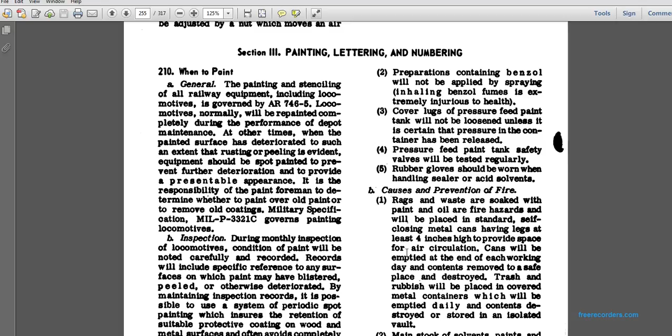During the monthly inspection, the locomotive's paint condition will be noted carefully and recorded. Records should include special references to any surfaces which may be blistered, peeled, or otherwise deteriorated. The possible use of a system of periodic spot painting will ensure retention of a suitable protective coating on wood or metal surfaces, and often avoids a complete repainting of the equipment.

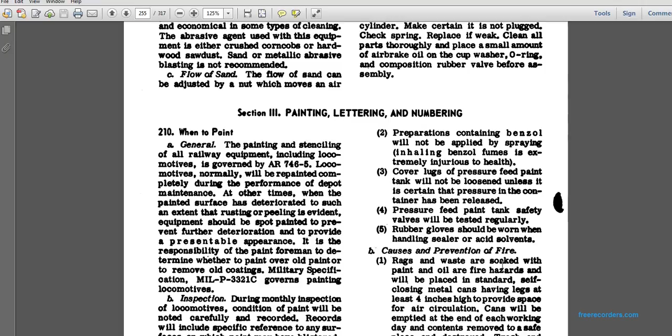211. Safety precautions. A safety respirator will be worn during all spray painting operations. Preparations containing benzol will not be applied by spraying. Inhaling benzol fumes is extremely injurious to health.

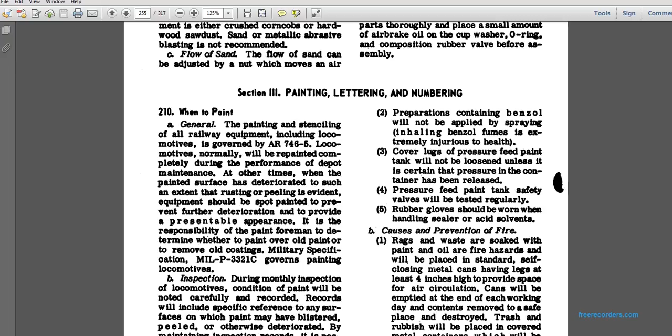Cover lugs of the pressure feed paint tank will not be loosened unless it is certain that the pressure in the container has been released. Pressure feed paint tank safety valves must be tested regularly. Rubber gloves should be worn when handling sealer or acid solvents.

For the prevention of fires, rags, waste, and other oil and paint-soaked materials which are fire hazards will be placed in standard self-closing metal cans having legs at least 4 inches high to provide space for air circulation. Cans will be emptied at the end of each working day, with contents removed to a safe place and destroyed.

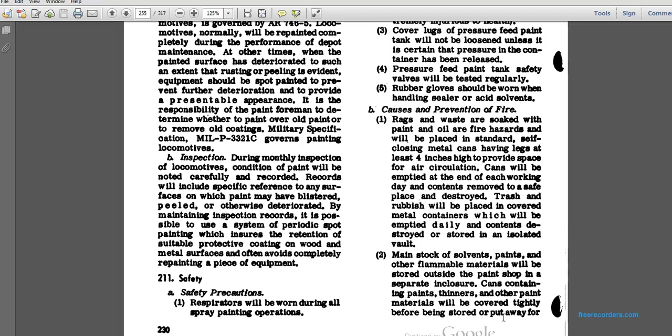Rubbish will be placed in covered metal containers which will be emptied daily, with contents destroyed and stored in an isolated vault. Main stocks of solvent, paints, and other flammable materials will be stored outside of the paint shop in separate enclosures. Containers of paints, thinners, and other paint materials will be covered tightly before being stored away for the night. Precautions outlined by Army regulations for the storage of gasoline will also be followed for paint, thinners, etc.

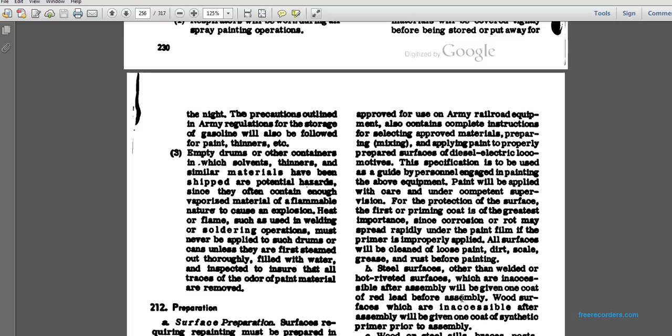212. Preparation. Surface preparation. Surfaces requiring paint must be prepared in accordance with the instructions contained in Military Specification MIL-P-3321C. Proper supervision and inspection of this phase is mandatory, since paint will not adhere uniformly to surfaces which are dirty or otherwise poorly prepared for applying paint.

Immediately prior to painting, all surfaces will be cleaned, dried, and conditioned to best ensure adhesion of the materials to be applied. Grease, oil, and other foreign material will be removed. Extreme caution will be exercised when sandblasting locomotives to ensure that sand does not enter the bearings and contact surfaces, which may be detrimental.

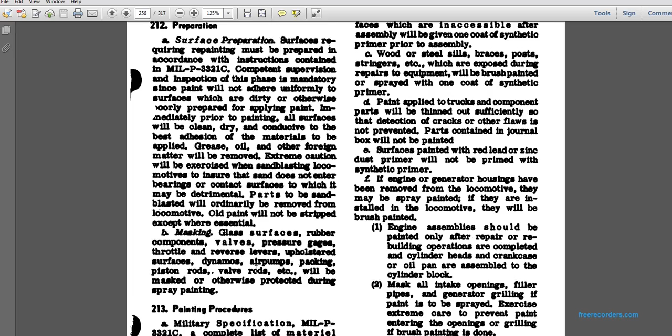Parts to be sandblasted would ordinarily be removed from the locomotive. Old paint will not be stripped except where essential. Masking. Glass surfaces, rubber components, valves, pressure gauges, throttles, reverse levers, upholstered surfaces, dynamos, air pumps, packing, piston rods, and valve rods, etc. will be masked and otherwise protected during spray painting.

213. Painting procedures. Military Specification MIL-P-3321C, the complete list of materials approved for use on Army railroad equipment, also contains complete instructions for selecting approved materials, and for preparing, mixing, and applying paint on the properly prepared surfaces of diesel electric locomotives.

The specification is to be used as a guide for painting the above equipment. Paint will be applied with care under competent supervision for the protection of the surface. The priming coat is of greatest importance, since corrosion or rot spreads rapidly under a paint film that is improperly applied.

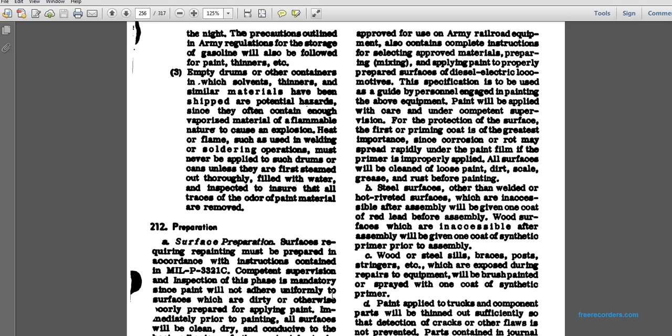All surfaces will be cleaned of loose paint, dirt, scale, and grease before painting. Steel surfaces, other than welded or hot riveted surfaces, which are inaccessible after assembly will be given one coat of red lead before assembly. Wood surfaces that would also be inaccessible after assembly will be given one coat of synthetic primer prior to assembly.

Wood or steel sills, braces, posts, stringers, etc., that will be exposed during repairs of the equipment will be brush painted or spray painted with one coat of synthetic primer.

Paint applied to truck components will be thinned sufficiently so that detection of cracks and other flaws is not prevented. Parts contained in the journal box will not be painted. Surfaces painted with red lead or zinc dust primer will not be primed again with synthetic primer.

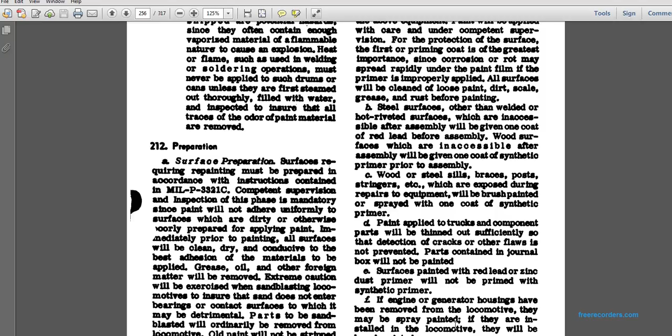If the engine or generator housings have been removed from the locomotive, they may be spray painted. If they are installed within the locomotive, they will be brush painted. Engine assembly should be painted only after repair or rebuilding operations are completed.

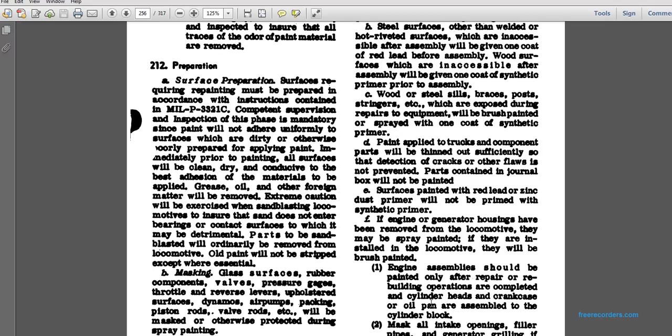Cylinder block heads, crankcases, and oil pans are assembled to the cylinder block. Mask all intake openings, filler pipes, and generator grilling, if paint is to be sprayed. Exercise extreme care to prevent paint from entering the openings of the grilling if brushing paint is done.

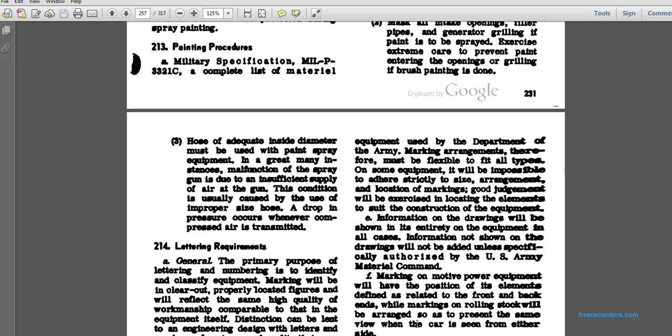A hose with adequate inside diameter must be used for the paint. In the spray equipment, malfunction of the spray gun in most instances is due to insufficient supply of air to the gun. This condition is usually caused by the use of an improper size hose. A drop in pressure occurs whenever compressed air is transmitted.

Lettering, general: the primary purpose of lettering and numbering is to identify and classify equipment marking will be clear cut. Properly located figures will reflect the same high quality workmanship comparable to that of the equipment itself. Distinction can be lent to the engineering design with letters and numbers; neatness and quality contribute to the general appearance of the equipment.

Even the roughest freight equipment will be given the highest possible degree of perfection in balance and proportion of the design of the markings. Because in many instances letters and numbers are copied from the equipment in the yard and train personnel read them at night and while the equipment is in motion, it is extremely important that the letters and numbers are legible and correctly placed.

Letters and numbers on Department of the Army railroad equipment will comply with the requirements of AR 746-5 and MIL-P-3321C, in accordance with the allocation of numbers for the Continental United States or theaters of operations. Letters and numbers will be in accordance with the illustrations in this manual for the various types of equipment.

Letters and numbers illustrated in figure 96 are authorized for all railroad equipment to ensure uniformity and identification; classification label styles and proportions have been analyzed mathematically and geometrically in drawings. Letter and numbering on the locomotive is illustrated in figure 98. The Air Force insignia will conform to the dimensions in paragraph 215.

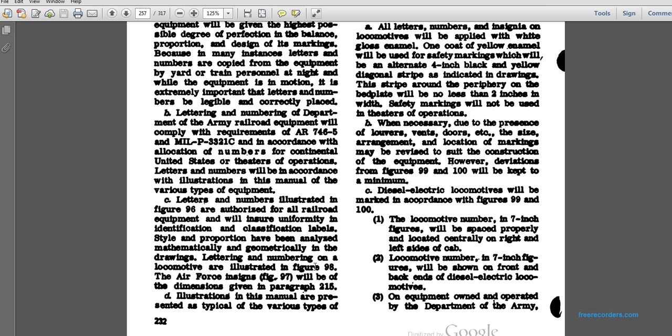Illustrations in this manual are presented as typical for the various types of equipment used in Department of the Army marking arrangements. Therefore, marking must be flexible to fit all types of equipment. It will be impossible to adhere strictly to the size, arrangement, and location of the marking. Good judgment will be exercised in locating the elements to suit the construction of the equipment. Information on the drawing will be shown entirely on the equipment.

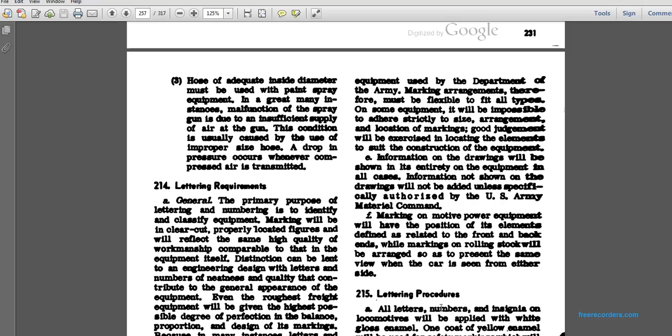In all cases, information not shown on the drawing will not be added unless specifically authorized by the U.S. Army Materiel Command. Markings on motive power equipment will have the position of the elements defined and related to the front and back ends, while markings on rolling stock will be arranged so they are present in the same view when the car is seen from either side, like east and west.

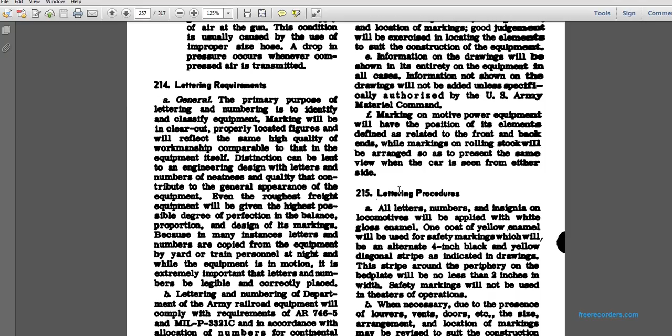215 letter procedure: a letter number insignia on the locomotives will be applied in white gloss enamel, one coat. The yellow enamel will be used in the safety markings, which will be an alternate 4-inch black, yellow diagonal stripes as indicated on the drawings. The stripe around the periphery on the bedplate will not be less than 2 inches in width. Safety markings will not be used in theater operation.

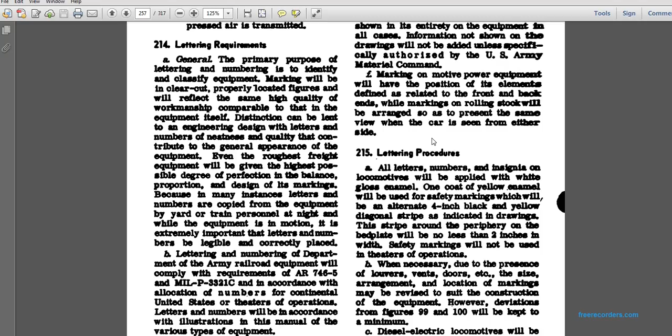When necessary due to the presence of louvers, vents, doors, etc., the size, arrangement, and location of marking may be revised to suit construction equipment. However, deviations from figures 99 and 100 will be kept to a minimum. Diesel electric locomotives will be marked in accordance with figures 99 and 100.

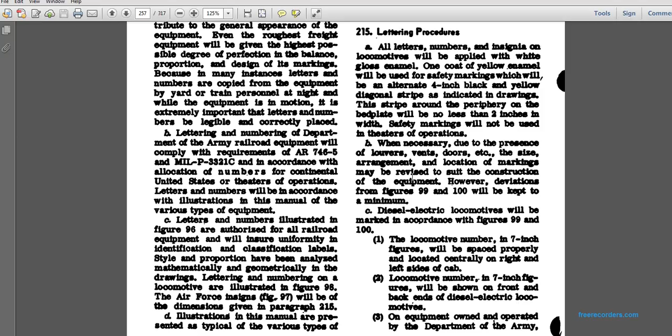Locomotive numbers in 7-inch figures will be spaced properly and located centrally on the right and left side of the cab. The locomotive number in 7-inch figures shall be shown on the front and back ends of the diesel electric locomotive on equipment operated by the Department of the Army.

Here's the letters, the insignia. The word Transportation Corps in 3-inch letters will be placed as shown, with the words United States Army in 7-inch letters on right and left sides of the motor housing locomotives, centered on the cab.

The lettering will be to the rear on the cab for some types, forward on the cab for others. This lettering may be raised or lowered in space suited to the grill openings inside the plate.

Shop initials, type of repairs, category of maintenance, and date out of the shop, in 1-inch characters, will be indicated on the main air reservoir according to the following conditions.

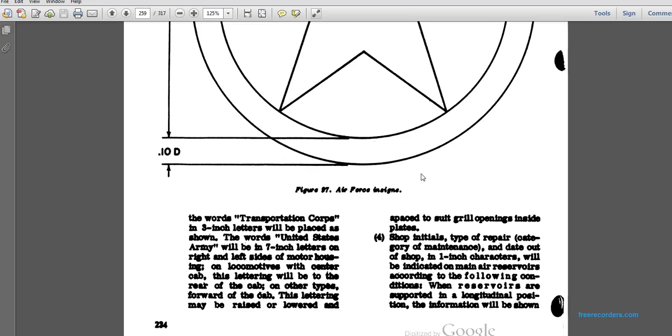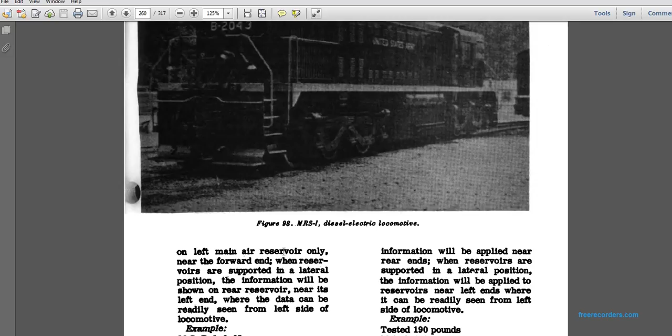When the air reservoir is supported in the longitudinal position, the information will be shown on the left main air reservoir, near the forward end of the reservoir. Where reservoirs are supported in lateral positions, the information will be shown on the rear reservoir near its left end, where the data can be readily seen on the left side of the locomotive.

For example, MSB 1665. This is the MRS-1, MRS diesel electric locomotive. In theater operation, shop initials will not be shown.

Test pressure in pounds per square inch on the top line, and the shop initials with the date of the hydrostatic test on the second line. First line characters will be 1 inch, with one inch space between the lines, applied to the main air reservoir according to the following conditions.

When the reservoirs are supported in the longitudinal position, the information will be applied to the rear ends. When the reservoirs are supported in lateral positions, information will be applied to the reservoir near the left end, where it can be readily seen from the left side of the locomotive.

Example: tested 190 pounds, MS 1665. In theater operation, shop initials will not be shown.

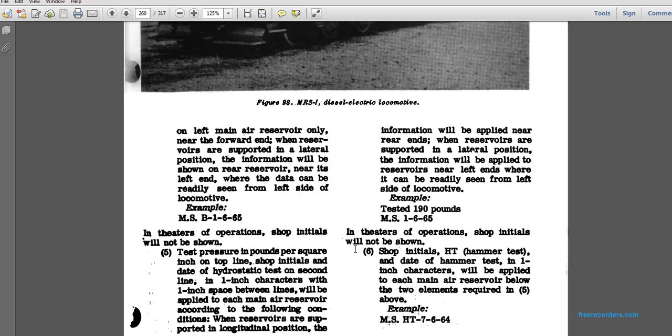Shop initials: HT for hammer test. The date of the hammer test, in 1-inch characters, will be applied to each main reservoir below the two elements required above: MS HT 7664.

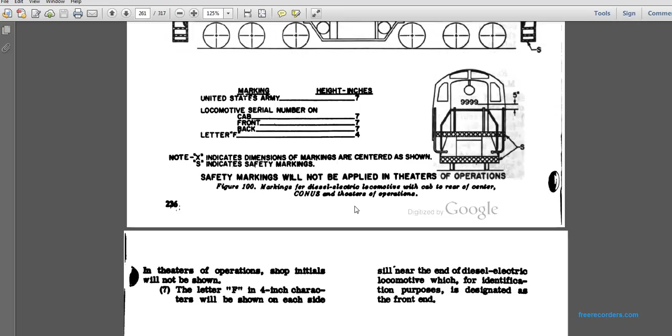In theater operation, shop initials will not be shown. The letter F in 4-inch characters will be shown on each side near the end of the diesel electric locomotive, for identification purposes, designated as the front end.

Part 7, Diesel Electric Locomotive Repairs, Chapter 19, Repair Facilities.